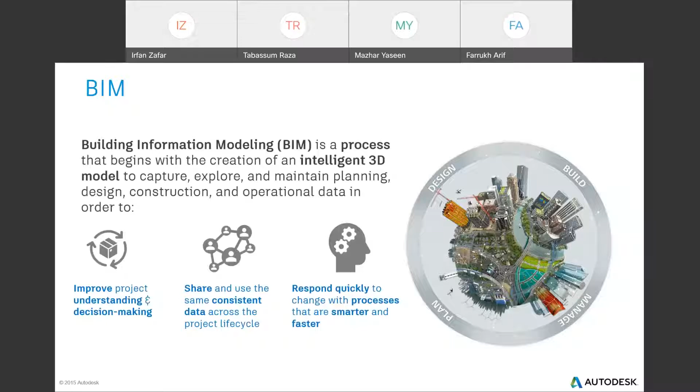Now, let's zoom into what really happens. BIM integrates multidiscipline models. BIM works for buildings, roads and highways, infrastructure, dams, hydropower, oil and gas. These are all structures.

Typically, a building is designed by an architect, then the structural engineers come in, then the MEP comes in, and the civil engineers. They all have their various contributions, and they put it all into one multidiscipline intelligent model where you get documentation and design review.

And then it has quantity takeoff, analysis and modeling, things like clash detection, so that you avoid very expensive outcomes — sometimes you have to demolish parts of your building. That is typical in Pakistan. Many construction firms tell me that they have to actually redesign things.

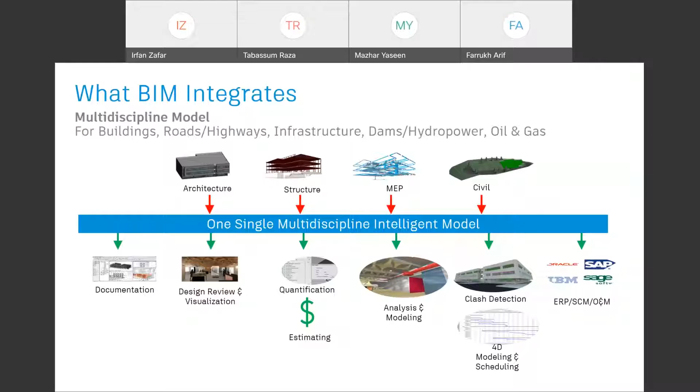Lastly, but not the least, you have 4D modeling and scheduling and some ERP integration, which still needs to take place in Pakistan. I'm sure somebody must be doing it here.

Okay, so what does BIM do that CAD cannot do? BIM does not waste your time. With CAD, you cannot do parametric modeling, you cannot do structural analysis, you cannot do energy analysis. BIM allows you to do automated quantity takeoff.

You can do scheduling, clash detection and resolution, monitoring, and cloud remote collaboration. That's something that actually helps you improve your quality and productivity while reducing cost and time.

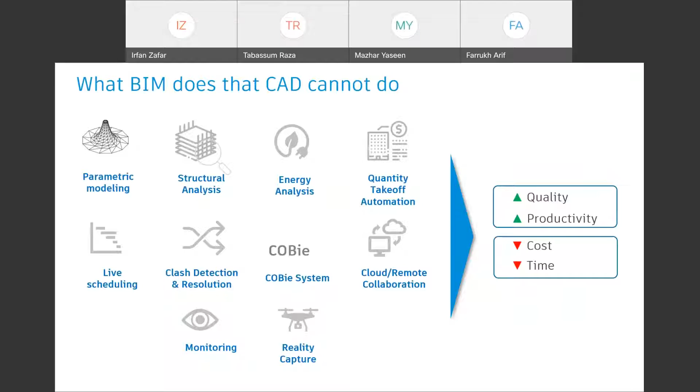So how do we deliver infrastructure? When we have large capital projects, typically they are over-budgeted, delayed, and not very transparent. 69% are over budget, only 25% of projects come within the deadline, and 25% of infrastructure costs happen because of rework and change orders.

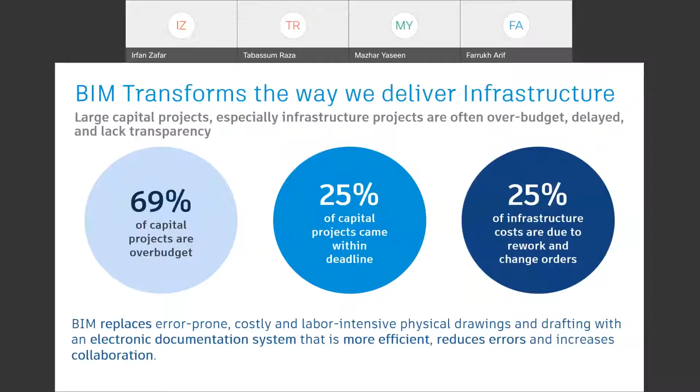So replacing all the error-prone, costly, and labor-intensive physical drawings and drafting with electronic documentation systems — BIM will help you reduce all the errors and increase collaboration.

Now, here's the design effort curve, which I'll show you very quickly. What you typically get, curve number 3, is that the design effort is put in during construction. That's the traditional decision process. And what happens as a consequence is the longer you wait, the more the cost of changes.

What BIM helps you do, if you look at curve number 4, that's the preferred decision process — that's where you take all your effort and shift it towards the design side.

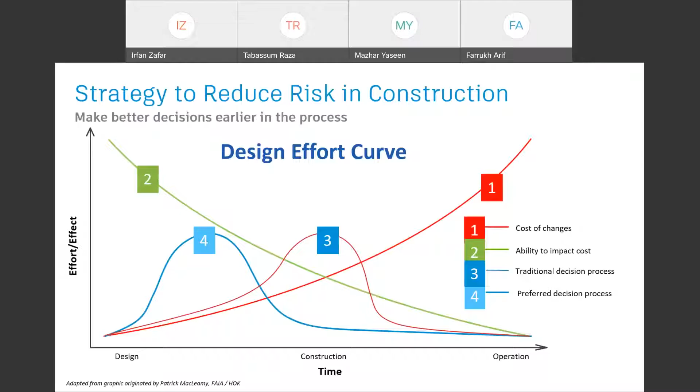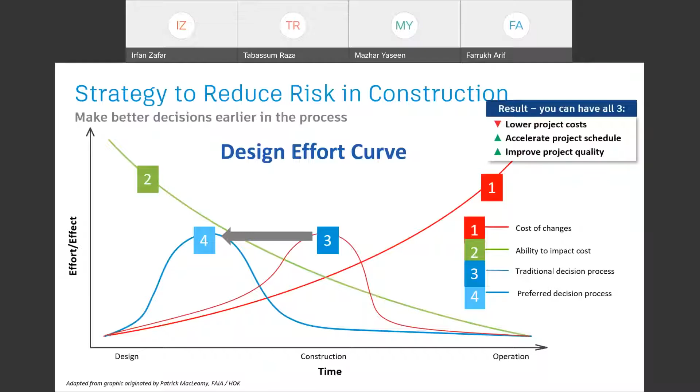When you have that, your ability to impact cost reduces at the end. So if you folks have any questions about this, you can always reach out to me. So the idea is to take it from number 3 to number 4. At the end, you have to lower your project costs, accelerate your project schedule, and improve quality. So any examples of who has gained from this?

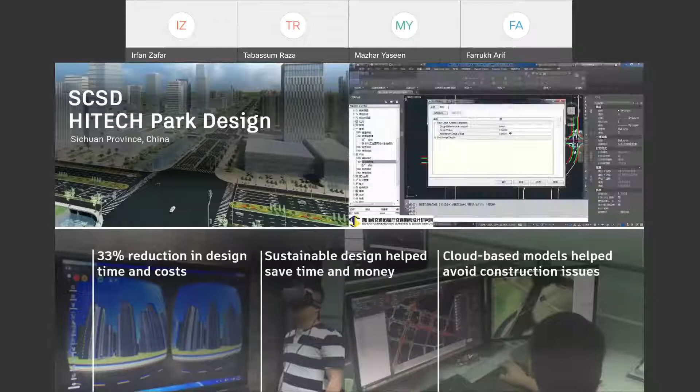There's a Chinese project, the high-tech park design. They have 33% reduction in design times and costs. They know this because they've measured it before and after BIM. With and without BIM, you can tell the difference. You need to be able to quantify what you do.

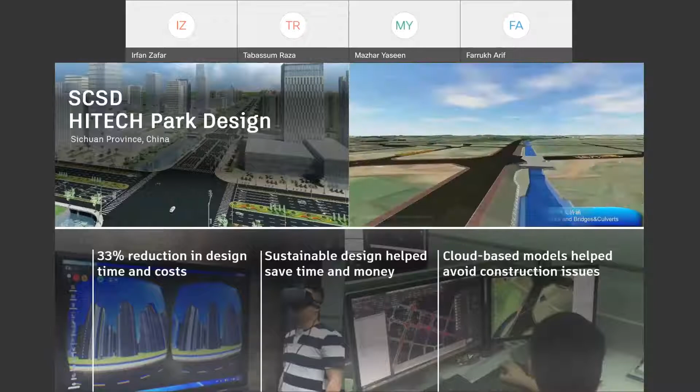Then you have a quick redesign of interchange. Now you have another interchange, just a second. So basically this is an interchange in the US.

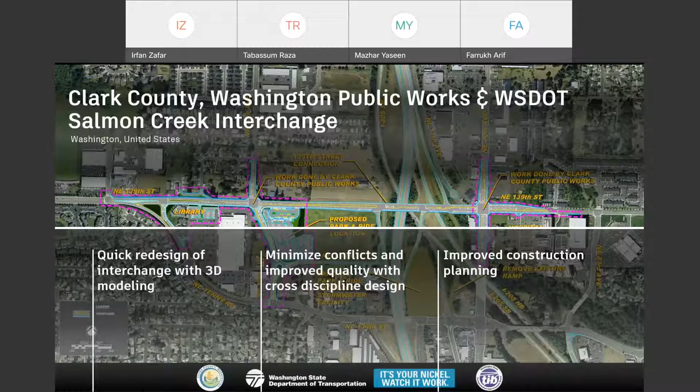There were lots of 2D designs. They moved to 3D, and there's a lot of intelligent design which actually helps you. And I'm sure there will be lots of other speakers who will actually give some examples of it.

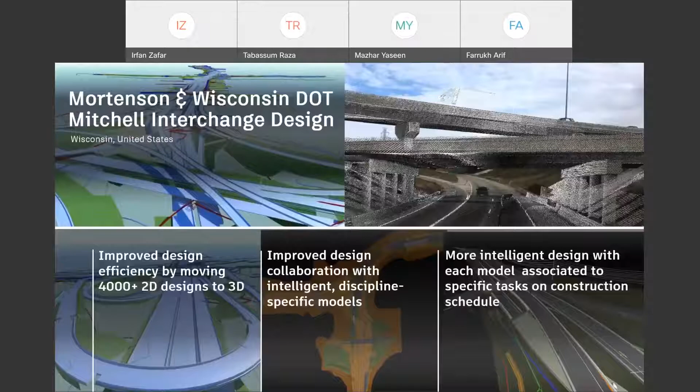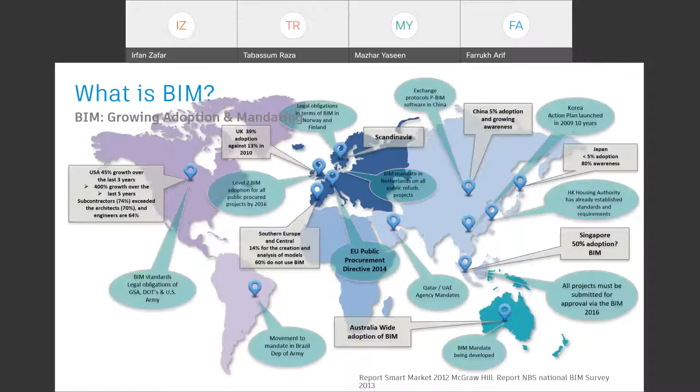Why did they mandate BIM? Let's just look at the top 3 reasons: energy efficiency, reduced delivery time, reduced cost. In the case of capacity building, the UK has actually undertaken that effort because your BIM expertise will help earn you revenue. Their targets for 2025 are 33% lower costs, and I think they're well on the way to doing that - 50% faster delivery, 50% lower emissions, and 50% improvement in exports. The export is actually the BIM expertise used for managing foreign projects.

So their BIM Level 2 is compulsory on all projects from 2016 onwards. The European Union Parliament is all for it. United Arab Emirates started early, in 2014 - any building 40 floors and above needs to be done with BIM. In 2015, 20 floors and above needs to be done with BIM, and so forth. So any universities, hospitals, offices of foreign organizations have to be done in BIM because it saves time, effort, and money.

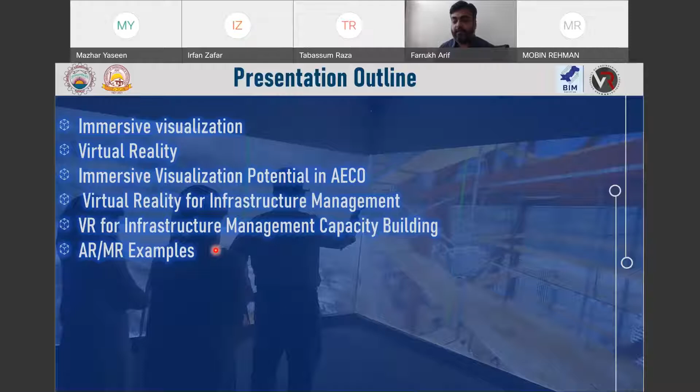So what do we mean by immersive visualization? First, we need to understand this: immersive visualization is basically any technique that creates images, diagrams, animation, and communicates a message. It is not limited to the construction industry or AECO industry. It has a vast domain and application, and in fact, it is being used much more in other commercial areas than in construction. So the general definition of immersive visualization is any technique that can create images or diagrams to communicate a message.

When we talk about converting this visualization into immersive visualization, it could be applied to mixed reality, augmented reality, or virtual reality. So the degrees or categories of visualization innovation in any field, whether construction or otherwise, include virtual reality, mixed reality, augmented reality, and immersive visualization itself.

Since our topic is how virtual reality can help the AECO sector, and its potential use in the AECO sector in Pakistan, let's restrict ourselves first to virtual reality. Virtual reality, as shown in some snaps of different systems, is a fully immersive, highly realistic experience where a user can wear head-mounted devices such as Oculus and HTC, which many of you might already be familiar with, or we may create a virtual environment through a projection system.

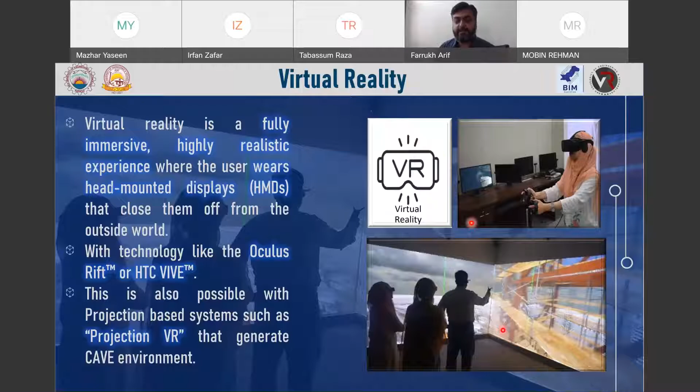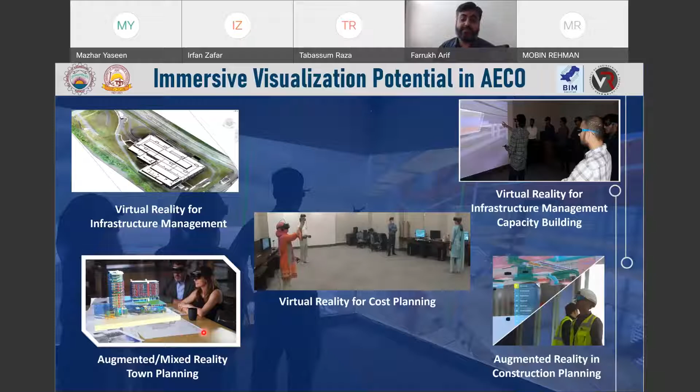So today I'll talk about four or five different examples, starting with virtual reality for infrastructure management, or infrastructure management capacity building. Then how we can utilize virtual reality for cost planning during the early stages of a project, what we call the semi-detailed estimating phase. Then I'll touch upon more examples of how we are currently experimenting with augmented reality in construction planning for visualization, specifically progress visualization of a construction project, and also how we can use augmented or mixed reality as a town planning example. I'll show you a couple of examples of what we are doing there as well.

The first project I'm going to discuss briefly was a collaborative effort between NED University, specifically the VR Center, and one of the renowned companies in the US, AI Engineers. They have also started their own business recently, so I give them full credit for that.

When we talk about virtual reality, there is much more to it with regards to what data set is used to generate the virtual reality. Different kinds of data sets can come from the actual as-built environment. Unmanned aerial systems, or UAS, commonly called drones, can be utilized to create visualization of 3D models for infrastructure.

Then what we call LiDAR scientifically, or laser scanning in common language, can be utilized to scan specifically inside a building or infrastructure facility and convert it into a 3D model. Of course, building information modeling typically provides you with an as-planned data set—I'm not saying it cannot do as-built—but it provides as-planned 3D model visualization of any planned infrastructure. So it is an information-based model.

Now, these three sets of information come from different sources. The aerial planning, of course, comes from the UAS, that is drones. The laser scanning can provide the as-built infrastructure facility visualization, and BIM can provide the as-planned data for comparison with what is actually being built on the site.

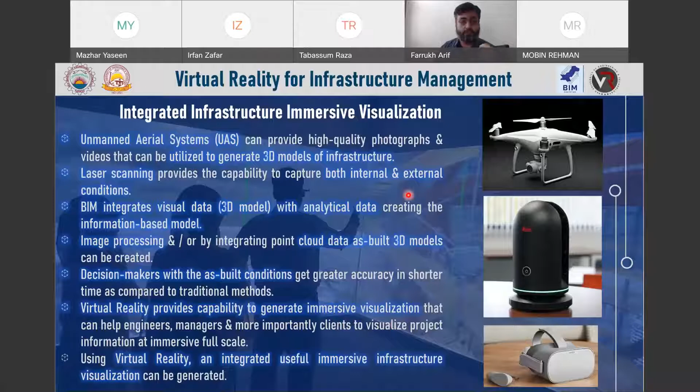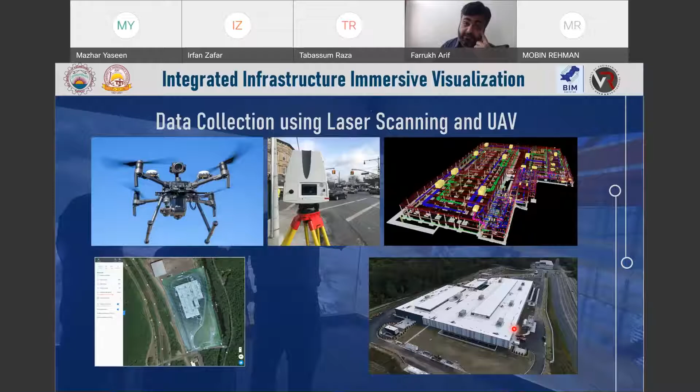Different data sets were collected. This particular drone was utilized for different flights, and you can see a flight's video clip, which was used to collect data with respect to its surroundings and landscape. And then this visualization—let me play it for you.

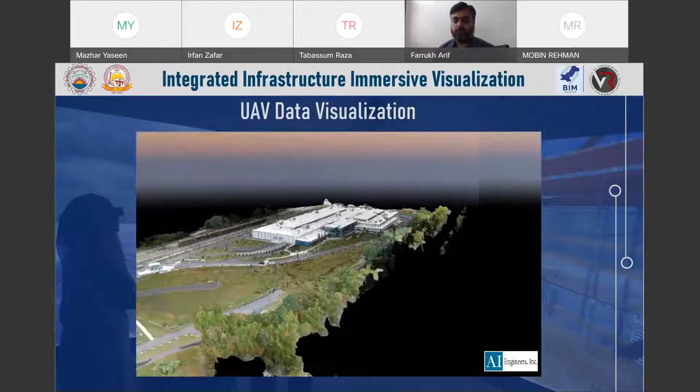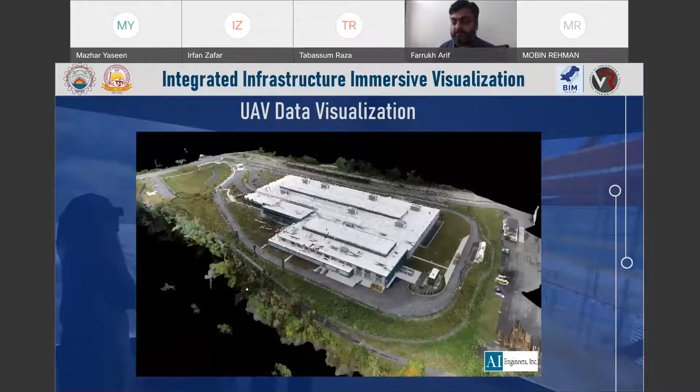This was a point cloud data set generated from the aerial or drone-based visualization. This data set was mainly utilized for surrounding planning or surrounding documentation of the facility data. You can see the resolution in the image. When you go directly inside the model, it becomes more and more processed. This is a lighter processed version of the same visualization, but you can realize how much cleaner a data set can be provided by drone imagery.

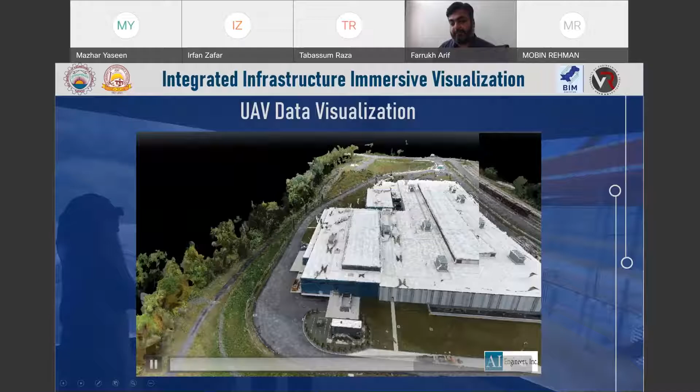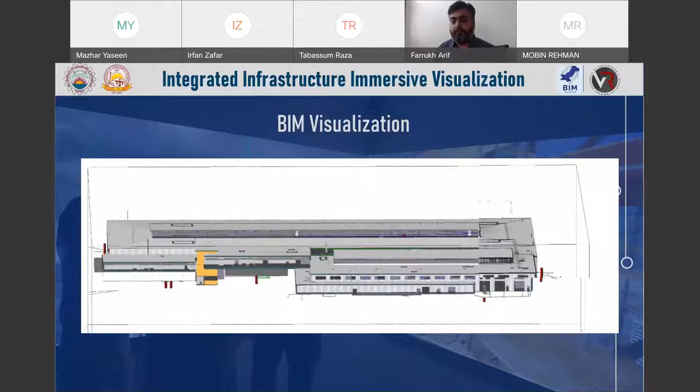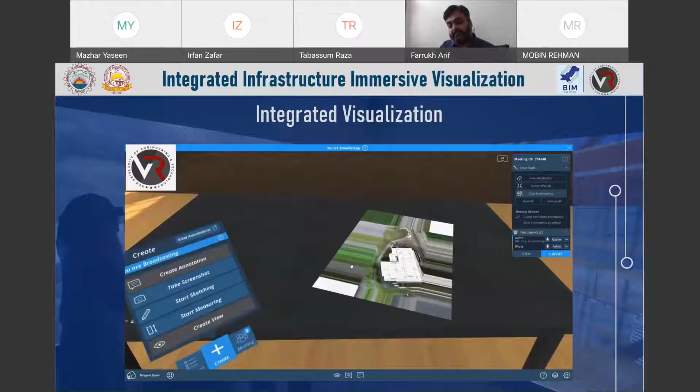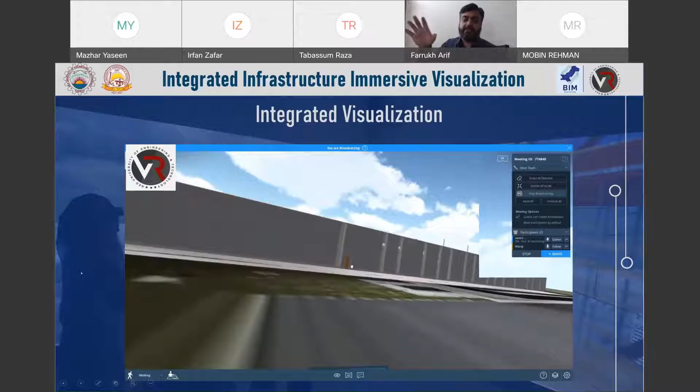Moving on, all three models were integrated into a virtual reality visualization through a workflow where the drone data was utilized as a kind of floor plan in typical BIM language, but used as a base layer, and then the BIM model as well as the laser scan model was overlaid onto it.

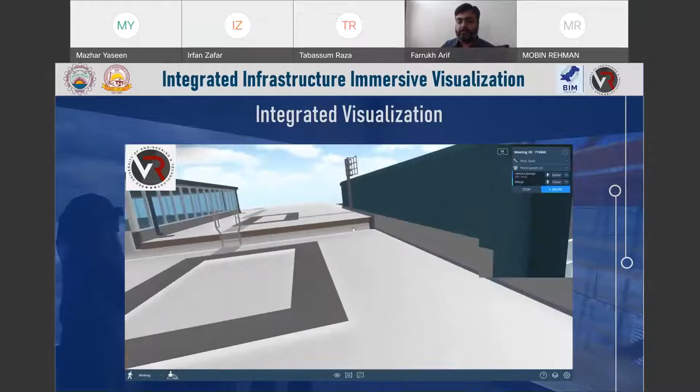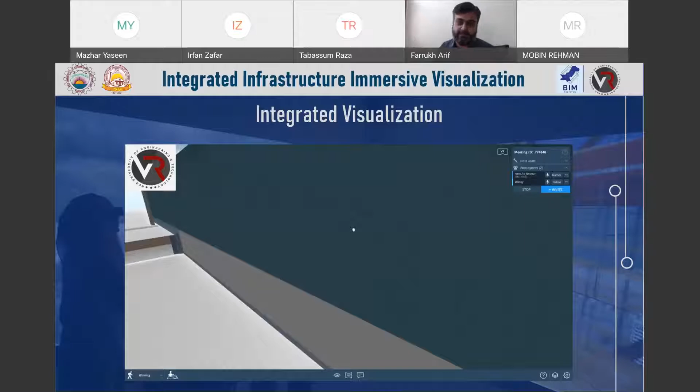If you see this particular video clip, it's basically a walkthrough of the facility between two participants—this is one of the test session videos. There are two different people, one in Pakistan and one in the US, walking through the whole facility in a VR environment wearing Oculus Go sets, which are mobile devices, marking, measuring, and inspecting everything. This kind of integrated visualization can help us, as I said, achieve better infrastructure management.

Moving on to the second example, which is a particular study conducted as a derivative of what we did in the previous study, but much more related to capacity building of different people. The background of the study is the same, but what we did was create a projection VR-based visualization of the Nipa Bridge. Those of you who live in Karachi are very much familiar with what bridge I'm talking about.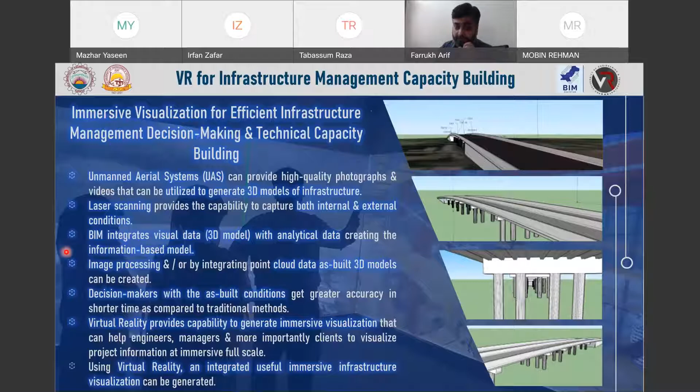So it's at the junction of Rashid Minhas Road and University Road, called Nipa Bridge in common language. What we did was basically model that Nipa Bridge into a 3D model.

This was the modeling routine, and then two different models were generated. One was the inspection model, because what we wanted to do through this study was to utilize virtual reality for training and capacity building of infrastructure managers, to evaluate whether it could be utilized for that purpose. Ideally, we would have had a laser scan model embedded into VR, but since we were assessing the capacity of VR for learning of infrastructure managers or potential infrastructure managers, we restricted the scope to learning rather than having the actual as-built model.

So the drawings were collected from the government, and then the bridge was modeled. The NBIS rating system from the US was applied, which is typically used by us, or a similar rating system, for rating the physical condition of infrastructure, specifically bridges.

Now this picture is a 3D rendered snapshot of the tutorial model in which the participants of the study were immersed into the projection VR system. We have the capacity of immersing 15 people at a time with an operator or moderator.

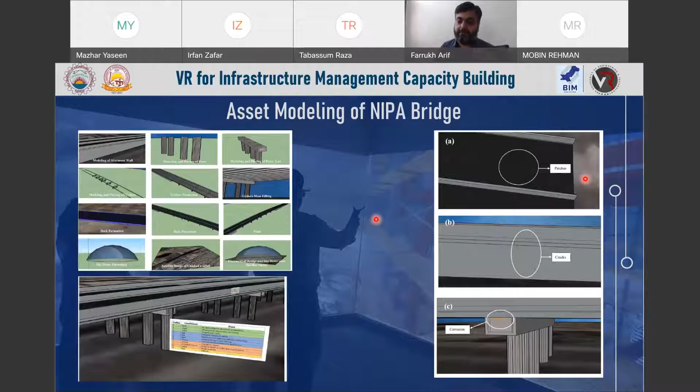About 70 people were involved. Let me shift the slide first. Before I explain the test session...

This is just a walkthrough in VR, recorded from the projection VR system, of how this area looks. We took the Google imaging from the available Google Maps and overlaid the whole NIPA Bridge, which was modeled, whether the tutorial model or the inspection model. There were two different models, and in the projection VR system we work with different languages to make it interactive, specifically C or Python. This is the walkthrough of the whole area.

Unfortunately, we did not have a good resolution from Google Maps of the Gulshan area where this bridge is situated, but you can see the capability in this.

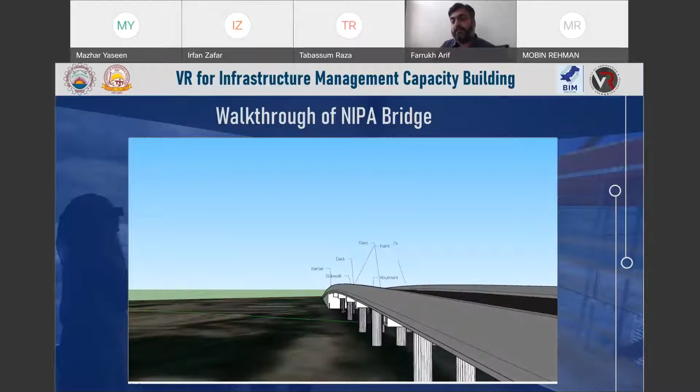After this, test sessions were conducted. A total of around 70 to 80 people were immersed. There was a 15-minute session, and out of that, half was to explain the rating system, and the rest was to get them immersed again into the inspection model and ask them different questions. After that, their feedback was collected via rubric.

This is to show the capability of utilizing virtual reality for capacity building in infrastructure management in the AECO industry. The aspects evaluated through rubrics were the comfort of using the gadgets, dizziness, overall comfort, and sense.

We also had a small quiz where immersed subjects were asked to rate, on the NBIS rating scale, the different physical deteriorations incorporated into the inspection model, and they rated them. Their remembrance, or what we call cognitive learning in education, was also measured through a different rubric, where they were asked to rate whatever they saw in virtual reality. Those results were also very valuable.

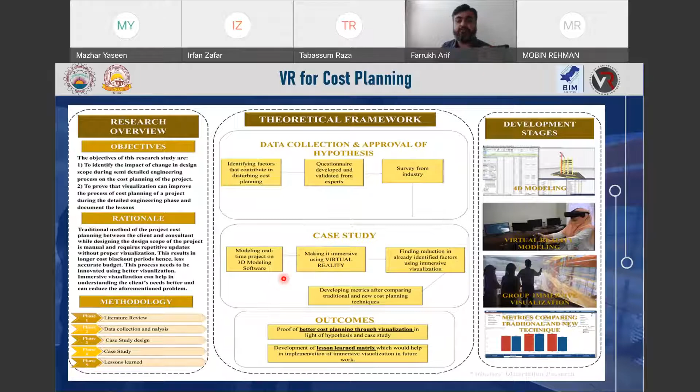So basically our hypothesis - the ones highlighted or illuminated - were actually to prove that factors related to lack of visualization during the semi-detail engineering phase, where the conceptual estimate or conceptual design is being converted into a detailed design, impacts the cost planning of the project. So this was our hypothesis. The second hypothesis was that immersive visualization could be a solution to resolve that. So first we wanted to prove that lack of visualization is a problem, and second, we wanted to utilize immersive, virtual reality form visualization to overcome that issue.

So we went to the industry and refined the factors which were identified through different literature, different projects, and this focus group, the details of which are provided in this table, and then conducted a detailed survey from the whole construction industry of Pakistan who were involved in building construction. There was a response rate of 33% - typically in scientific studies, this is acceptable. Our hypothesis - let me go back.

Our hypothesis testing, which is a statistical tool, proved that the ones which are highlighted do really exist. So number one, there is an issue of lack of visualization during the semi-detail or detail engineering phase. The visualization that is typically being done is 2D visualization. If people are using information modeling, yes, they do look at it from a building information modeling perspective, but a full-scale visualization is still lacking, which ultimately converts into cost overruns during the execution phase.

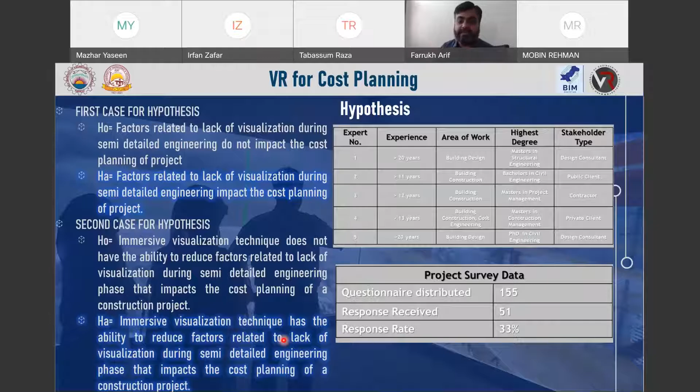And secondly, we thought that virtual reality as a full-scale visualization tool could overcome this lacking. So we modeled a project which was in the design phase at that stage - it's a nanotechnology center being developed at NED University.

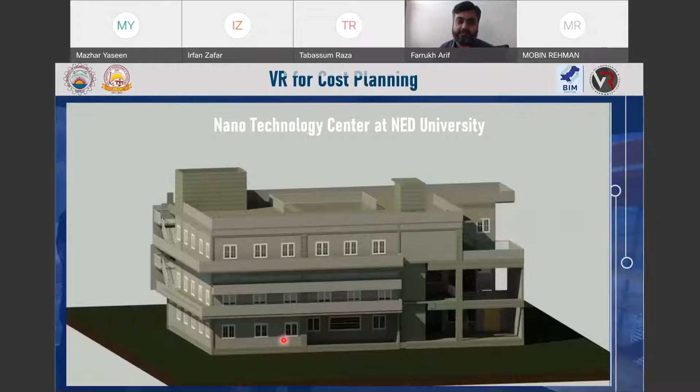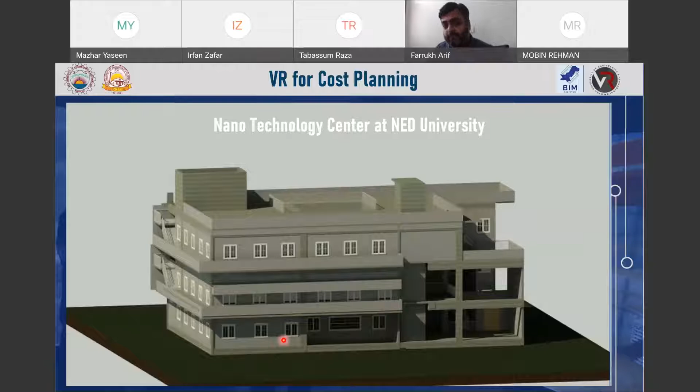Now the groundbreaking has been done - I think foundation work is also completed. This is way back in 2017 when it was being planned, as drawings were being constructed. So it is a nanotechnology center being constructed at NED University. The changes which were highlighted in this, which were not present before we immersed stakeholders into it, were different changes.

One issue was related to this beam which is highlighted. This picture is from the VR stakeholders immersive visualization session, where one of the stakeholders highlighted this beam's depth to be problematic. The architect was adamant that the beam's depth was destroying the architectural image of that passage, and wanted the beam to be more shallow. But the structural engineer had a point of view that no, this is not deep, this is similar to the other beams and it would not hinder that.

These are common problems which now seem very little, but if you think about it, if the structural engineer had to change the depth of the beam, the beam itself and the surrounding frame would have changed as well. This problem was due to the fact that every time this debate was done, it was on a 2D plan, on an AutoCAD version of the drawing or on a PDF version of the drawing. Hence both of them might have been correct, but at that stage they were not talking in the same language. That is my point.

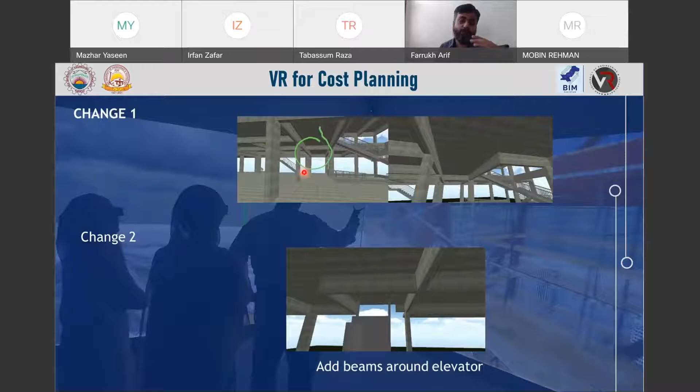Secondly, there was a position where the elevator well was there, and the structural engineer wanted to add a beam, but the architect did not want it. There were some issues with the height of the stairs as well. So then we created a virtual reality visualization of this whole project, and conducted test sessions to prove the usability and check the model. These snaps are from the test sessions.

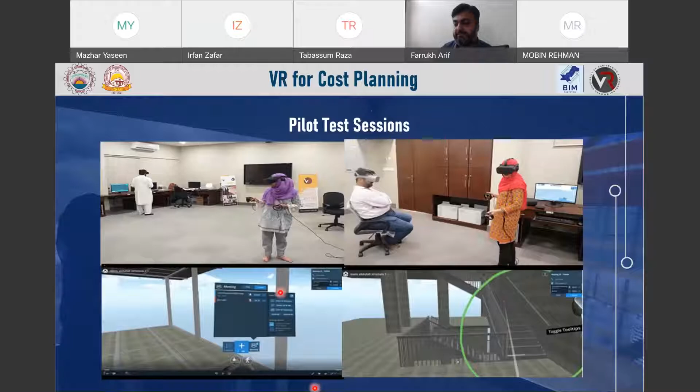We immersed all the stakeholders, and I must commend one of the master's students who worked with me on this, Ramsha. This is the architect, the client, the structural engineer, and the moderator. They were immersed into a virtual reality meeting of this project, and they walked through the whole building to resolve all these issues.

One of the key issues was with regards to the beam depth, as I was explaining. I was the viewer in this, so you do not see me immersed in it. The architect and the structural engineer went under that particular beam, and the architect looked at it in real scale on top, and she realized that, okay, the structural engineer was right, and the beam's depth is not that much of a problem with respect to architectural design. That issue was resolved then and there.

You can see that with just this small example, there were 3-4 other issues which were also resolved. I'm not going into the details of those because of time, but you can realize that having a height view, a full scale view of a certain project or building to be constructed, can resolve issues that otherwise required a lot of communication over a period of time. Virtual reality visualization quickly helped us resolve that issue within minutes.

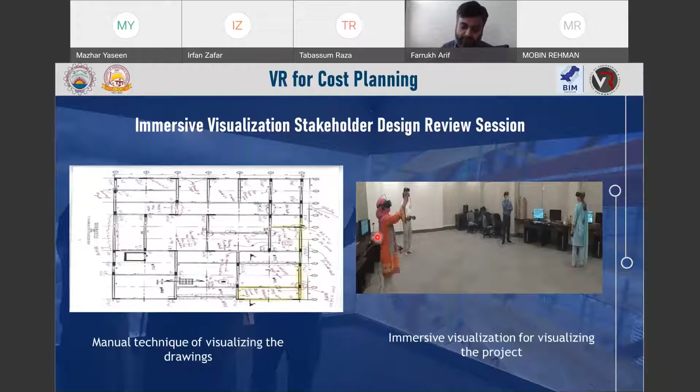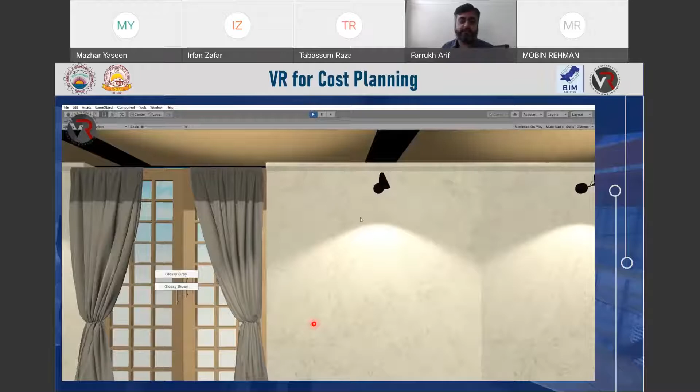This whole session ran for about 20 minutes, in which a number of issues, specifically 5 different issues between the structural engineer and the architect, were resolved. So this is the magic, or the actual benefit of it. Now, I gave you 3 different examples of utilizing virtual reality for infrastructure management, managers' capacity building, as well as cost planning and control. There are other projects as well which we have conducted in Pakistan.

Let me give you some examples of augmented and mixed reality, because that would also open up our minds about how that can help us in better delivery of projects in the AECO sector in Pakistan. Now, when we talk about augmented or mixed reality, they are usually used as synonymous terminology. Actually, technically speaking, they are different. But I've explained it here combined so that we can have a baseline understanding of both.

Augmented reality animates data in a real world scene. If you allow me, I'll explain the difference between VR and AR in this manner: in VR, an artificial environment is created and a real person is transported into that artificial environment. So the environment is artificial, but the person who is transported into the environment is real at full scale.

So that gives him a real world sense. In augmented reality or mixed reality, it's the other way around. The environment is real, but the model is basically brought into the real world environment.

Now this opens up a lot of opportunities specifically for architecture, engineering, town planning, as well as progress visualization. Because when you can have the virtual model or the 3D model just like on your table in an augmented reality environment, in your office, at your room, in your boardroom, even at full scale if you are communicating with different devices together, that can help you a lot in superimposing what has been actually built and what is left to be built. When they are combined together, this gives you a better visualization of as-planned versus as-built.

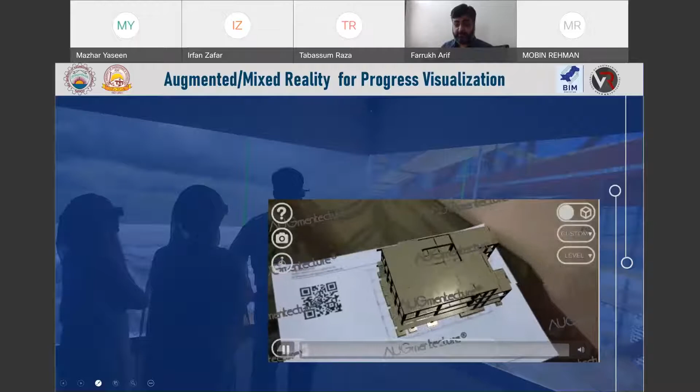One is to utilize a normal mobile phone or a tablet for the purpose. So this is that visualization. You can see that a paper drawing is on the desk, and the 3D model of that drawing is being superimposed onto that plan. So now the drawing is no more a 2D drawing - it's a 3D drawing in a real world environment. So this is a mixed reality example.

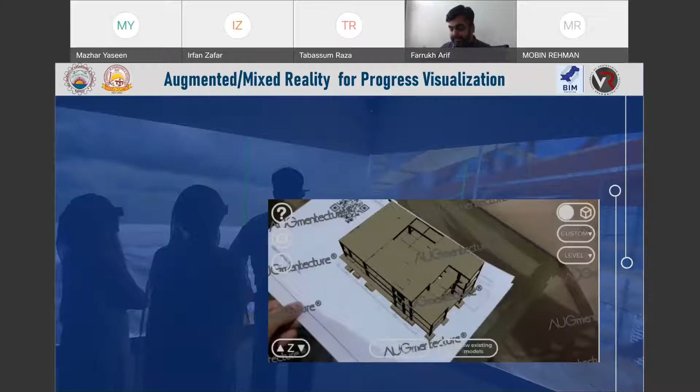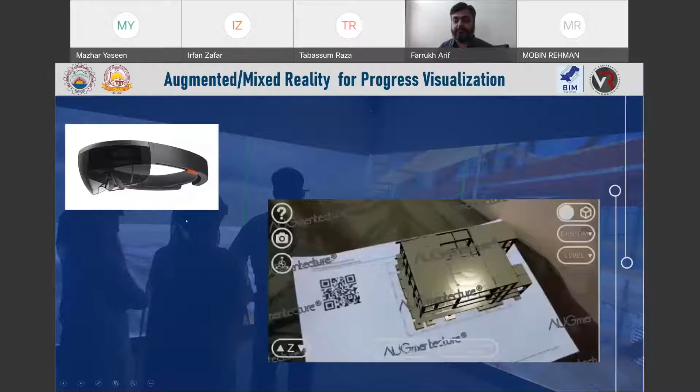This is a small app that we are developing. Other than that, of course, we are trying to utilize HoloLens for the sake, and we are utilizing it. We have done some progress measurements. We do have this capability at the VR Center, and we are utilizing HoloLens 2 for that very reason.

The idea is that this is the location of that construction - this is a 15-20 day old picture, but here already the construction work has started. We had the drawings, we had the schedule, we developed the information model for that, and now we are trying to superimpose it into an environment where we can have the already constructed scene through the HoloLens, and whatever is left on top of it. Many people are doing that in MEP worldwide - we are trying to do that for structural members, specifically in concrete construction. So that is how this study is different from the ones already done.

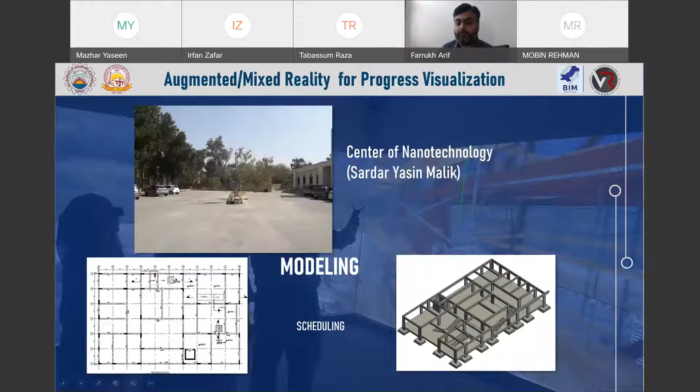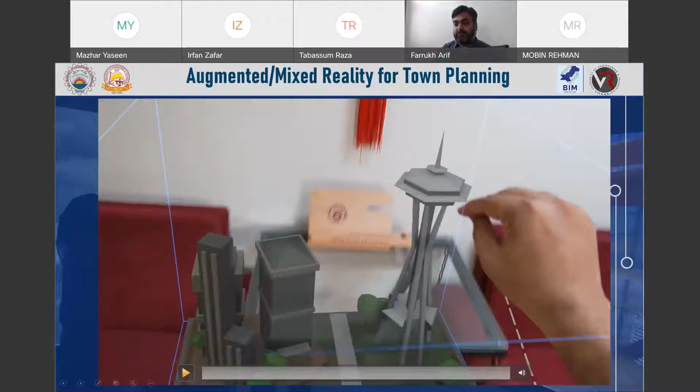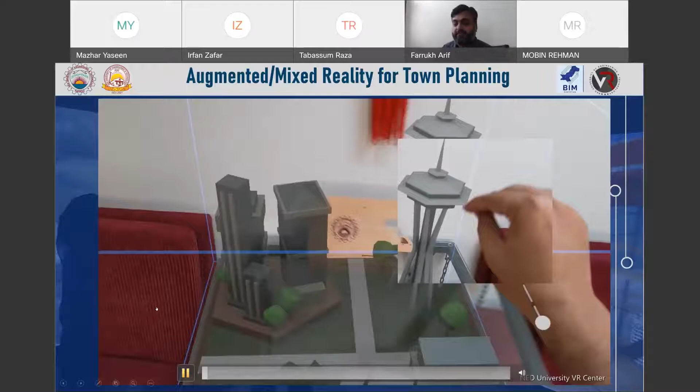Now the last example, because we are already on time, is of augmented reality for town planning. I just want to give you an idea, and this again is a video from our own facility. So what we did was a town planning 3D image, just to show you that this could be moved around, put onto the table. This is a small hypothetical town where we can utilize, upscale it, downscale it, mark it, move it - we can do anything with this.

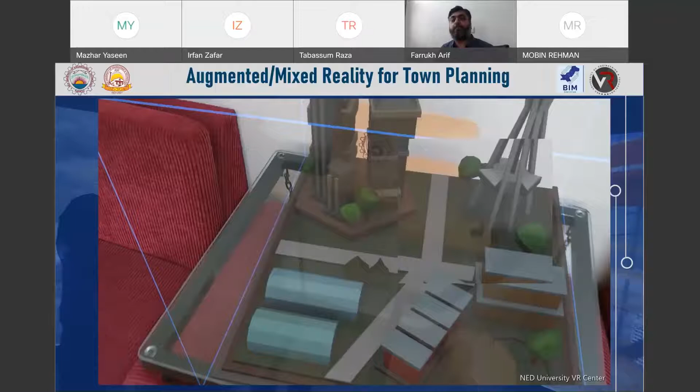And the meetings, which were kind of bored with different perspective people talking from different senses on a 2D drawing or a 2D visualization, now can have a virtual model on top of their table and can do the town planning in a better manner. Think about a big table where whole Karachi's master plan is in a 3D model and could be implemented. So a lot of discussion and planning could be done in a better way with this example.

So this is all from my side. Thank you very much, I tried to abide by the deadline. And if you have any questions, I'll be very much willing to answer those questions.